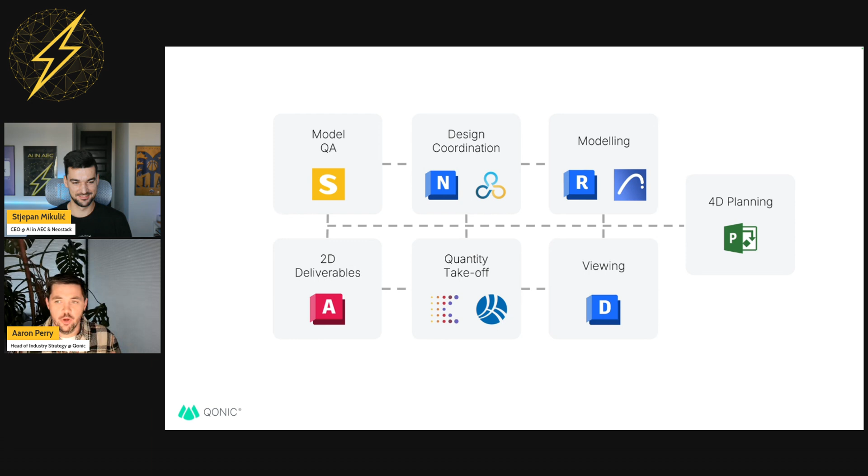But the challenge is when you want to move information between those different workflows, you do so by importing and exporting these kinds of file formats. And every time you do that, you're probably losing geometry, you're losing data, sanity, time, whatever it might be, and money. Every time you're moving between them, you're being frustrated by that process.

So probably the easiest way for me to describe what Qonic does is all of those things. It is a solid modeling tool with our own proprietary custom 3D solid modeling engine that runs in a web browser. It is a fantastic viewing tool, but more than that, you can actually edit stuff. You can play and manipulate with geometry and data in a really customizable, fluid way. You can use the tool for quantification, for design coordination and clash detection, and so on and so forth.

And I think the biggest value with this is that you're not wasting time in moving the data, but also in operation of the project. I've been through so many different workshops where you're sat in a room talking about a clash between a piece of steel and a duct, but actually that's no longer real, because in the live models it's already been moved around and maybe already been solved. So you kind of end up arguing about something that doesn't even exist anymore.

And so imagining it in a Qonic world, you're looking at design coordination in the same platform that you're modeling in. So when you see a clash, you just solve the clash instantly there and then, without going backwards and forwards three steps into different softwares. And so for me, this is that really, really bright light at the end of the tunnel that I'm super excited for everybody to get to, because it's a much more efficient way of delivering projects.

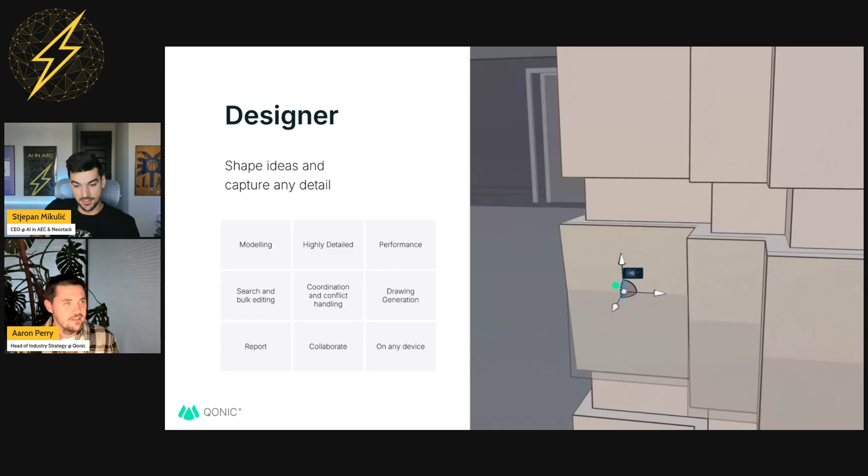Okay, this is a big announcement, so to speak, of what Qonic is. I'm excited to see the level it's at today, and what's your plan. You also mentioned your roadmap and so on. We're gonna get to all of those points. Yeah, I got some really fun stuff to show you around some live demos. Please go ahead, I'm gonna shut up.

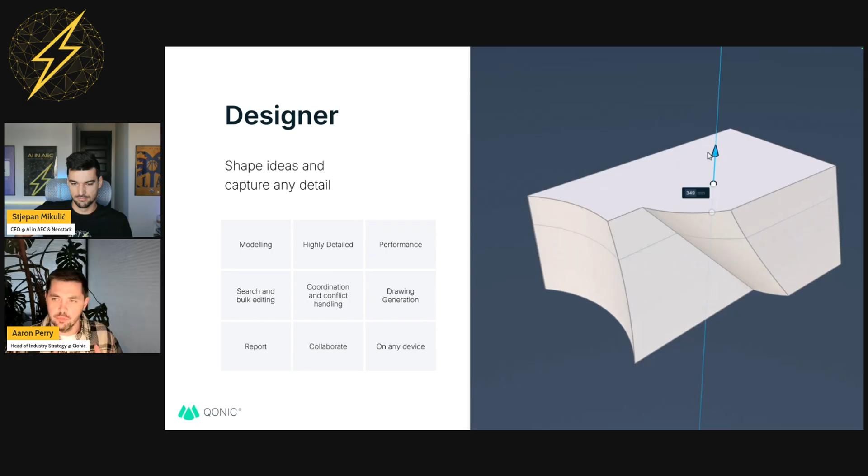Yeah, keep jumping in by all means. And maybe just to position it, because your audience is probably quite varied in where they're coming from, let me talk about it from four different perspectives. So from a designer side, my background is obviously architecture.

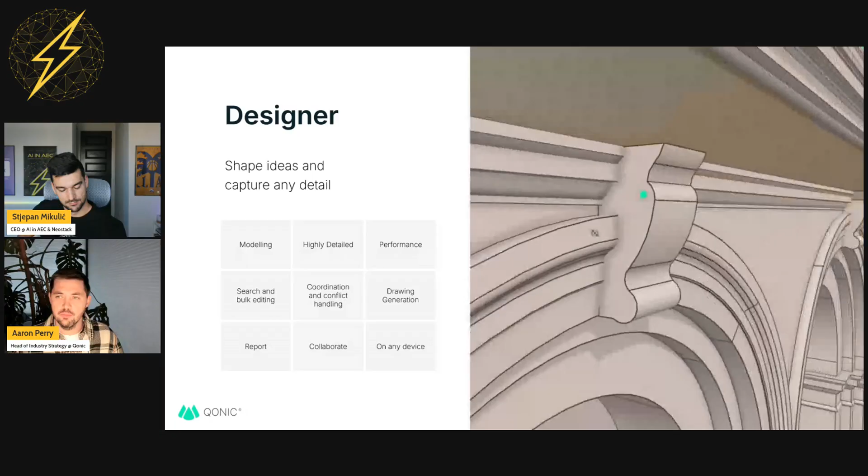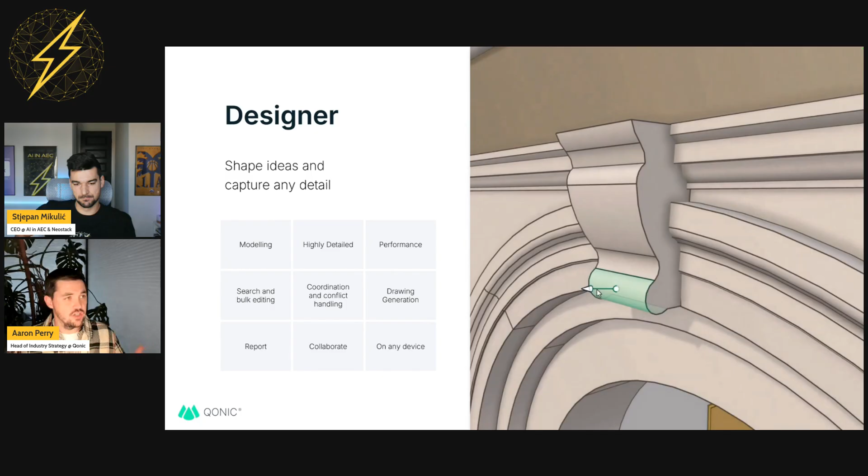Qonic for me is kind of incredible in that you have this super fluid, flexible modeling tool. Tools in here that you're recognizing from products like SketchUp or Rhino that allow you to just, when creativity strikes, grab something and move it and bend it and twist it and change it, without the kind of BIM object modeling tools that are quite locked and structured, where if you want to bend or twist something, you can't without editing it and fighting the software to do what you need to do.

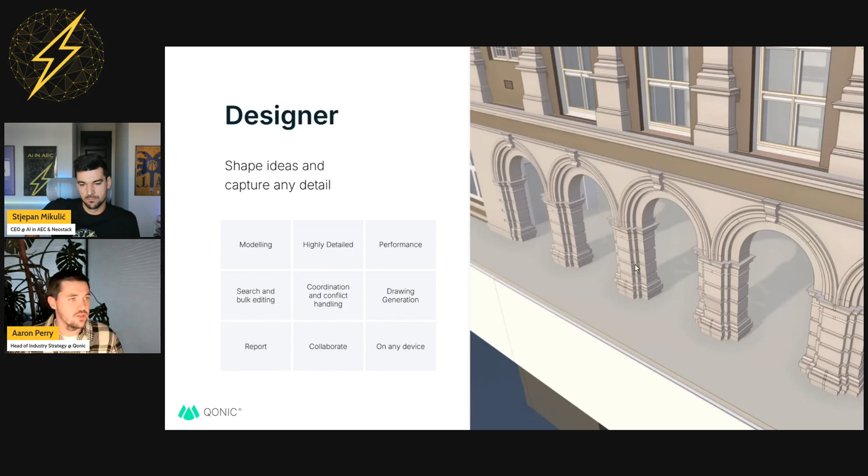So from the designer side, we have a lot of people using it because it's so fluid and flexible, but because it has an underlying IFC hierarchy and structure, you get the best of both worlds. You get the super flexible modeling, but you also get the ability to deliver a proper BIM project. Those two things combined is super powerful for designers and architects.

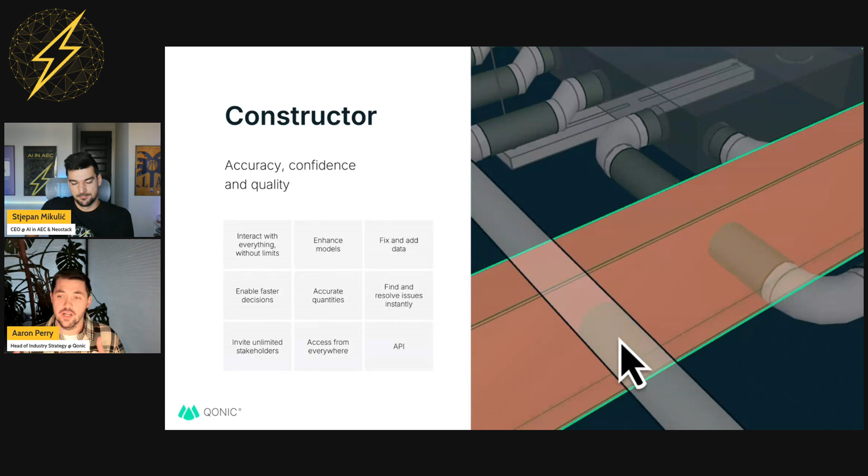Actually, more constructors and contractors use Qonic today, so I'd say this is probably the more popular segment. The reason is because effectively Qonic can do everything they need it to do. It's an amazing way for a constructor or contractor to aggregate all the models from the design team and the construction team and the supply chain.

Put 50, 60, 70 models up in Qonic. You can open them all instantly. You can open them in a web browser and understand the project. You can measure the project, you can review the project, and really start to get a feel for where it's at in terms of its delivery process.

You can quantify from it. You can do clash detection within it. You can really start to de-risk the project. It's very rare to be able to get all of those formats aggregated in the same place, but still do something with it, like actually edit stuff. If it's missing geometry or missing data, you can actually go in and start to change that.

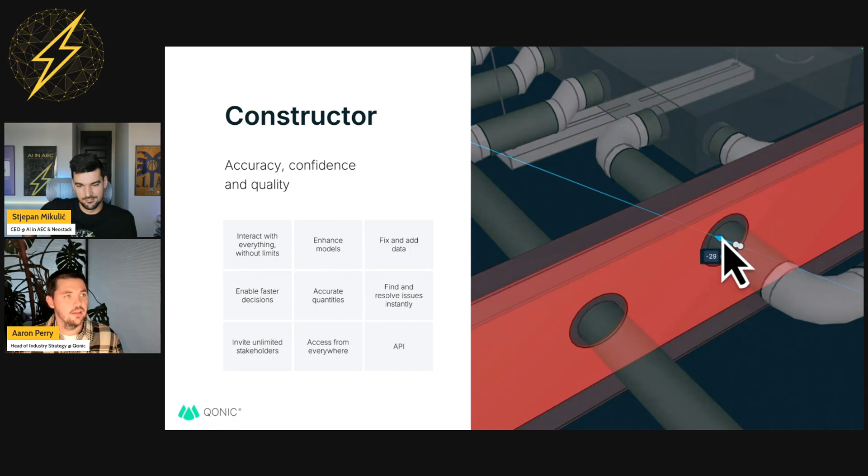And I know it's really small, but because it runs on a mobile device, someone being on a construction site can get the answer to the question they need instantly. It sounds silly, but they're looking at the exact same experience on the mobile device that they would be as if they were sat in an office. It's not a stripped down or exported version that runs better on mobile, it's the same thing. That is, I think, kind of unique to some extent. I've not really seen that in some of the other tools that offer those kind of mobile apps.

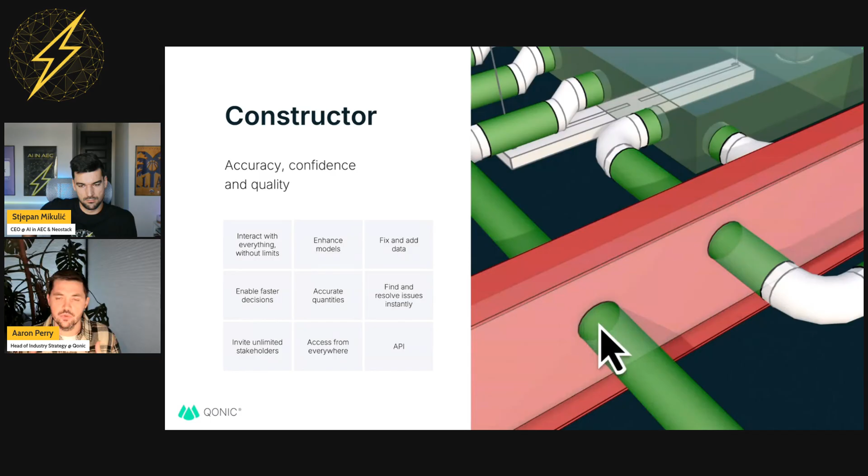For those kind of projects you work on with a deep requirement for providing information through the project, maybe you have a really engaged client that wants to use these models in this whole BIM output process to manage either the building or the estate of buildings they're inheriting. The information production is really, really important, and I know firsthand that often that gets left to the last minute. People realize it was serious when the client asked for the ones and zeros in all the right boxes, in all the right places, for them to actually use the project at the end.

And there's often a lot of excuses in information management, like, oh, it requires another tool that I don't have a license for, I don't know how to use. I guess those excuses kind of fade away when someone can click a link in an email and they're in the product straight away, right? They're just in the browser and they're editing data. So it is, again, proving to be really quite valuable from an information management point of view.

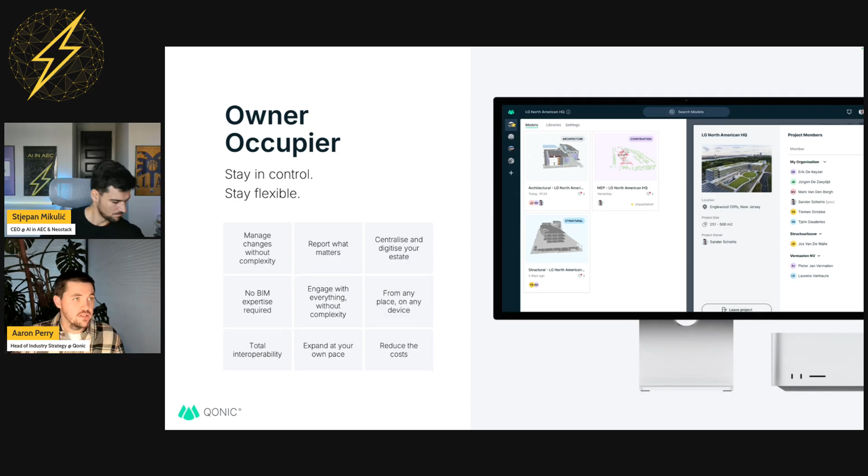Anytime they walk into a meeting room, they can just open up that data and engage with it. They can move walls around. They can understand what assets need to be maintained or managed after a few years. So there's a real focus from the client side of finally being able to do something with BIM data, which is something we're finding with a lot of the customers using Qonic right now.

And I guess maybe just finally on the overview of Qonic, it's an opportunity for the designer, the contractor, the owner, the occupier, all of those parties I just talked about, to actually be in the same place at the same time talking the same language, which is quite rare because usually there's quite fragmented conversations that are technology orientated sometimes, and those are the excuses why they can't all be having the same conversation at the same time. Qonic, I think, definitely starts to pull all of that together and allows for a type of conversation we've not typically had in AEC to date.

So yeah, there's an overview of Qonic in terms of what it can do. Okay, so if it would be one sentence, would Qonic be an all-in-one collaborative BIM management tool or a BIM modeling tool? What would you say it's better suited for?

Well, I think you obviously have a lot of conversations with a lot of startups, and you've probably seen over the last few years that many startups have started at the early stage, conceptual design, modeling, volumetric side of the spectrum. I think the best way I think about Qonic is that we went to the opposite end and said, let's focus on a platform that can handle the most complex amount of data possible, and then let's add the modeling tools a little bit later.

So Qonic's aspiration, to answer your question, is definitely modeling, but right now it's primarily an amazing tool to aggregate and manage all of that information that's come together. Because as you'll probably see in just a moment, you kind of fall off your chair the first time you see that quantity of data spinning around as if it's nothing.

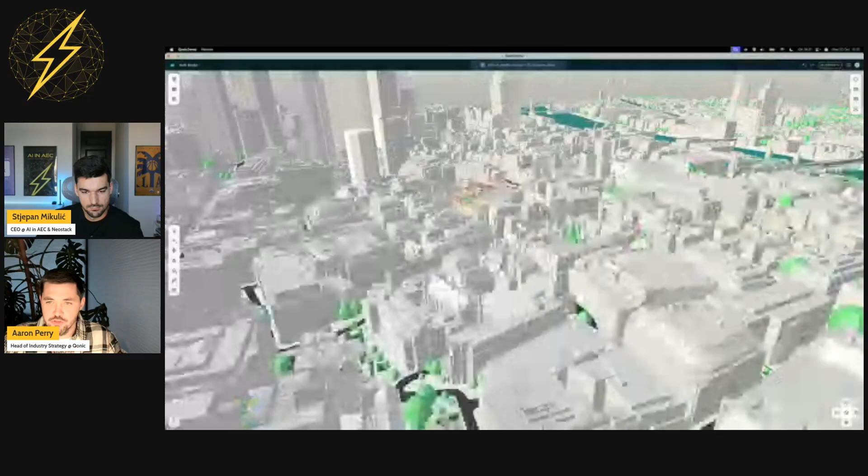I've just switched over to Qonic, which is running on my Mac, and I've just opened a project here in London. As you can see, the best thing for me to do right now is probably zoom out, and you can get a sense of what Qonic's all about. We have no issues dealing with huge scale geometry.

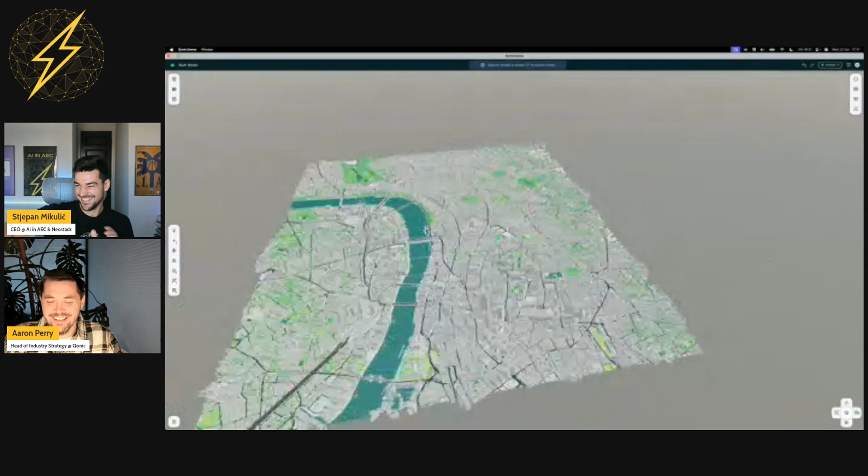Oh my god, you nailed it, man! I love this. Wait, so I have a couple of questions. Let's stay on this, this is amazing. First of all, how did you get this huge data set, and what is it? Is it like massing from, I don't know, Google Maps, somehow extracted? How did you get this?

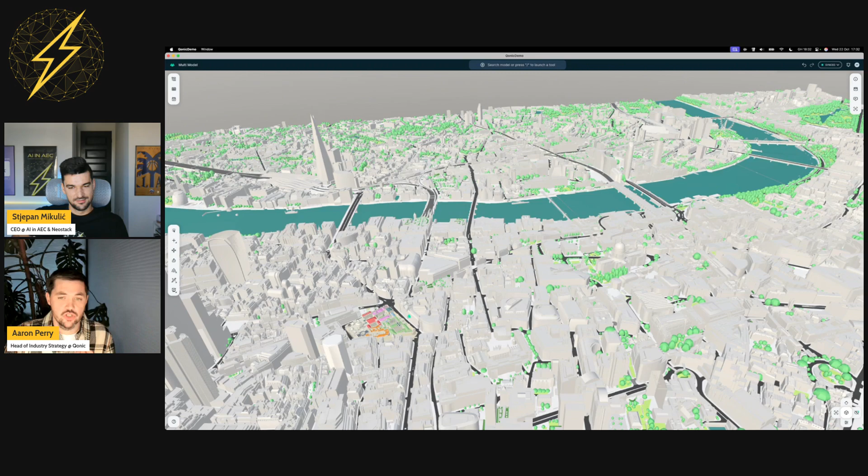Yeah, so this was actually some data that I had access to from a previous project I worked on in architecture. So I already had this geometry existing. This is the kind of geometry that when you're building a big building in central London, it's so important to have this contextual data so that you can see - especially in London, we have verified views around the city so that you can still see St. Paul's whilst you're building a building. So I had access to this data, but we've just announced some partnerships with companies like CityWeft, where you can actually bring in 3D data to instigate a project from. You'll see some examples of that on our LinkedIn as well. But ultimately, a user can bring in any source of data they like. So in this instance, it's just a giant bunch of solid models which represent buildings here in London. And I've obviously got a bit more detail here on this open source project for the Bank of England, which was made a couple of years ago, showing basically what the Bank of England looked like a few years ago.

Okay, and let me understand - so because you mentioned you're running it on your Mac, does this then require a Mac, or can you run it on Windows? Is it a desktop app? Is it a web app? What is Qonic?

Yeah, so the default is it runs in your web browser, and basically after this bit of the demo, I'm only going to show from the web browser. So it's kind of agnostic at that point which device you're using. We have an installer for Windows computers and for Mac computers, and basically what that does is it unleashes any performance restrictions that your browser puts on. A lot of browsers have a maximum amount of RAM they can use of your machine's compute power. So by installing the Windows or Mac installer, you move past those restrictions, and it can use the total performance of your local machine. It's not a requirement - you don't have to do that. But of course, when you're dealing with maybe a larger model, it's always preferable to use everything your computer can throw at it.

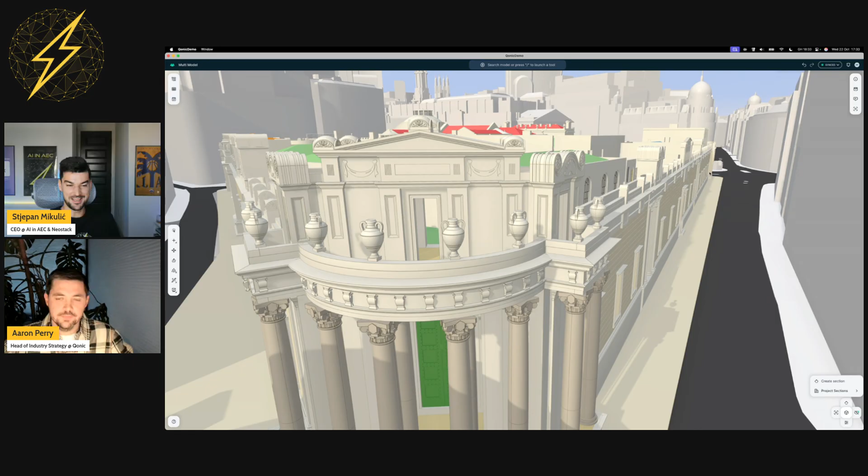So, wow! Please keep zooming around, man. I'm in love. This is awesome.

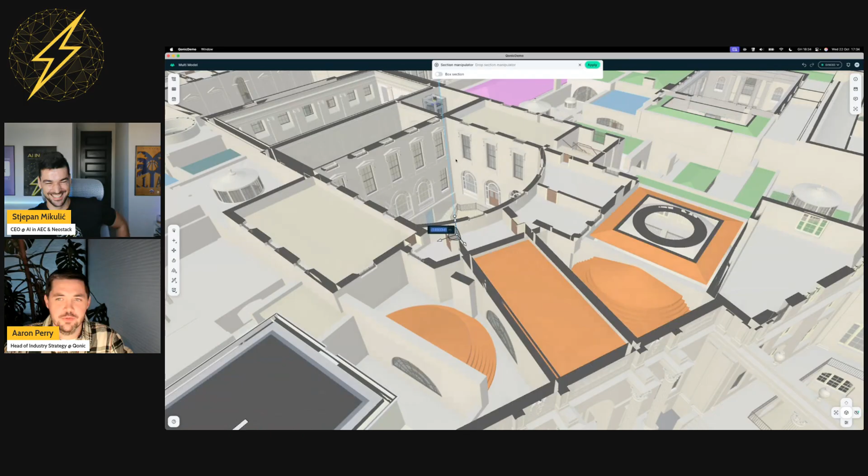Good stuff. Well, I remember the first time I saw this, and it's the type of thing that when I got back to my desk in the office and I was just sat there waiting, looking at a loading screen, I was just thinking, why do I have to do this? Why do I have to look at this loading screen? Why is this a thing that we've just accepted in our industry? Yes, and hopefully similar for yourself or for any of your viewers - you're kind of like, how am I doing this? And you can see that the level of detail here is basically streaming in as I zoom and move around the model.

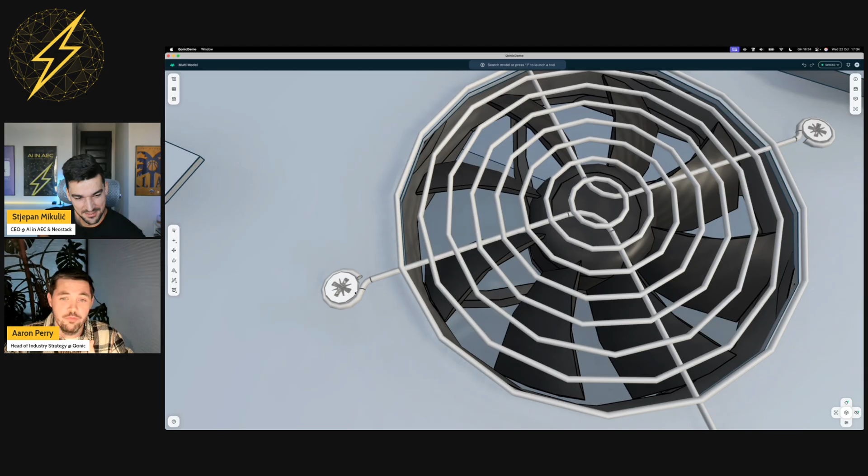This is what I'm talking about when I say gaming engine style technology. I've spent the last 10 years telling people not to model bolts, threads, and screws, but as you can see in Qonic, we don't really care. You can do that if you want, that's fine.

I wasted so much time myself in my work previously as an engineer, as an architect, as a BIM manager, just waiting. So what we would do, both at Sweco and Big, we would open the model before we even commuted to work. We would start opening the model, close the laptop, and then commute to work.

Or if you didn't do it, you'd open it at work, but then for the first hour I would just get back on email, drink coffee. Every time you wait for something, it's an excuse to open Facebook, open LinkedIn, something that takes you away from what you're supposed to do.

There's absolutely no reason why this industry accepts that performance. There are tools out there, hello Qonic, that completely ignore those traditional barriers. This runs in a web browser, so you can be on a laptop in a meeting room. These barriers, these problems that stifle our efficiency, they're gone with Qonic. That's the main thing I want people to be comfortable with.

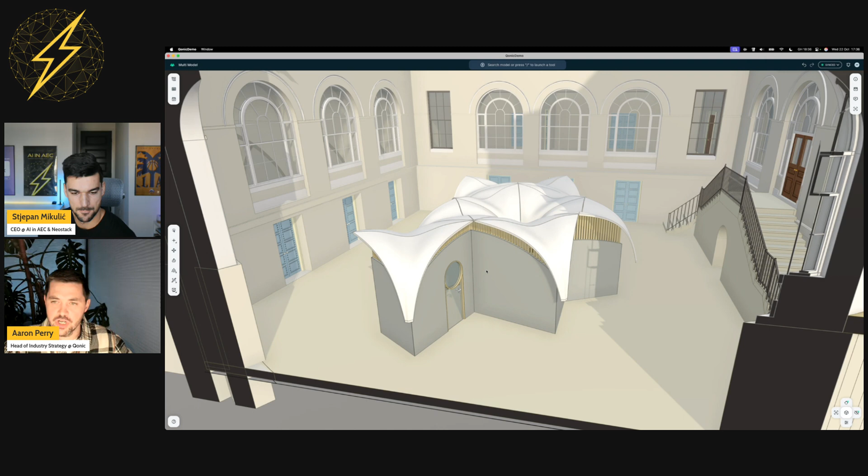Let me keep running through the demo here. I've got this pavilion in the courtyard of this project. This actually came in from Rhino, so you can see we've got complex geometry, difficult things going on. Qonic can engage with this, it converts it into solid geometry. This is not like a mesh you can't do anything with, this is all usable geometry.

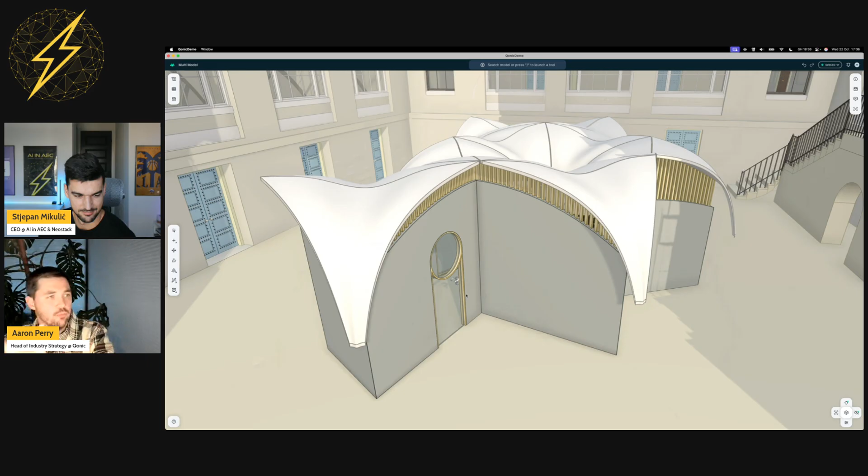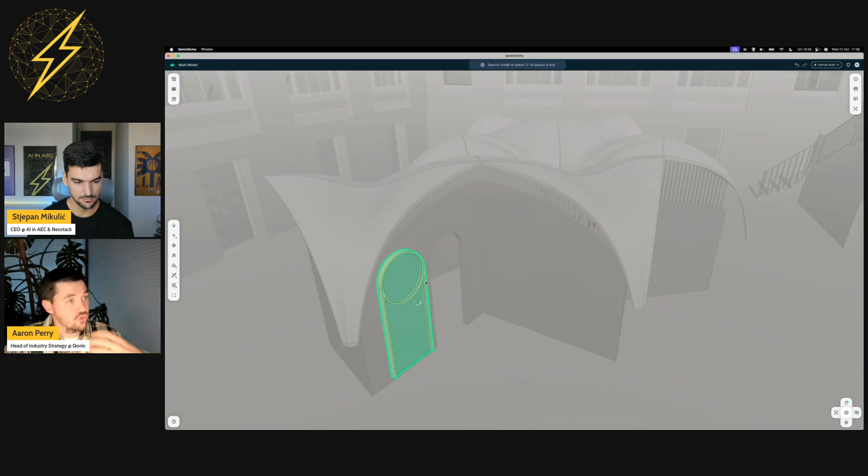So it's not uncommon to use this workflow, try it, and then come into Qonic and turn it into a BIM project and move it forward. For my first bit of the demo, I've got a door here and I'm just going to move it. The reason I'm doing that is this door came through IFC, and the problem with IFC is you lose all of the intelligence, all the constraints and associations you built up in your original tool.

This door that's come across, I'm not sure how well you can see this, but it's actually a building element proxy, unclassified geometry. It's called a door but doesn't actually perform or behave like a door. The challenge is it might look right in ArchiCAD or Revit, but when you need to give it to someone to use for something, that's where the intelligence really breaks down.

Now the example of utilizing AI, specifically machine learning, is we want to be able to classify things in this project appropriately. If I select this door and click into change and modify its data, I have a long list of all the things I could choose it to be. This is amazing because I could actually say it's a floor if I wanted to, I don't know why, but there are architects out there that claim walls are floors, fun stuff like that.

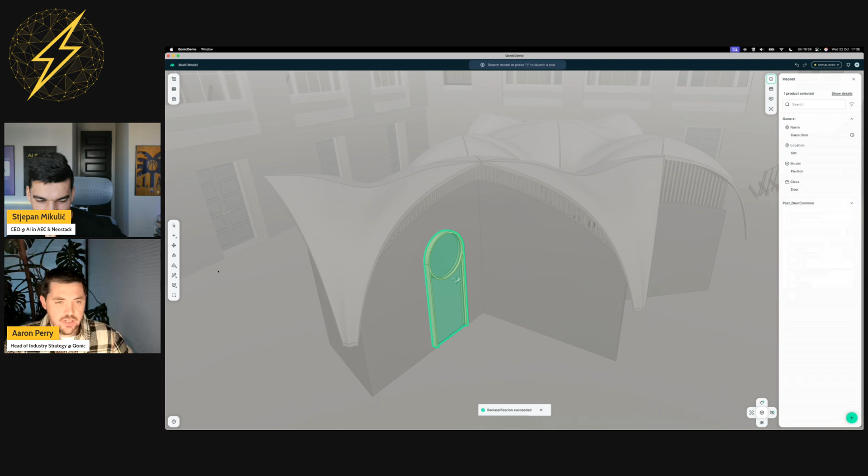But what I'm actually going to do is turn on our tool to automatically classify the object, and almost instantaneously it's a door. This sounds like a basic example, but now it will perform like a door, which means when I adjust it, stretch it, change it, modify it, schedule it, detail it, export it as Excel, it is now a door. This is a door item. This is now fully classified, data-rich geometry, even though this came into Qonic from Rhino like 2 minutes ago.

And the use case here, of course, this doesn't have to be something easy like a door.

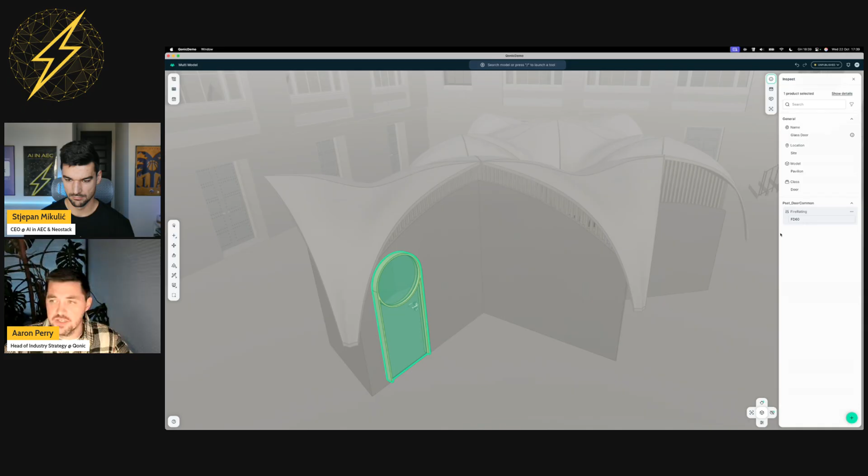Of course, this object, I can start to go in and add more data to it. So I've just realized it has no fire rating. I can just go in here and type in that it's FD60 from a fire rating point of view. Maybe if I browse my model, I've got multiple models open here.

Let's just do a little report of my project. This is the same setup, I've got it done by building, by model, and now by class. I can measure things in areas and volumes and concrete quantities, counts, etc. But I've got another configuration of this report in the background, which is about fire ratings. So I can see across my entire project that I have a series of doors that haven't actually been classified just yet.

So these are unclassified doors, they have no fire ratings. Maybe this is something I'm quite concerned about. Qonic's a really great way to visualize models. Maybe this is the first time I've ever opened this project, I don't really know it very well, but it's a really quick way to understand what is working, what is correct, and what is not right in my project.

With those doors, maybe I select them, and you can see all the parameters on the right-hand side, the data points about all these doors. They have different names, different typologies, different heights and widths and so on. The point I'm trying to make is how easy it is to improve and enhance the data of these objects. So I'm just going to add some IFC parameters, add the fire rating to these doors, and not just add that parameter to those objects, but also provide a data point, a value for that as well.

So all of these doors - 179 of which now have that 60-minute fire rating in my project. And again, this seems like a really small example. Think of it from the other side.

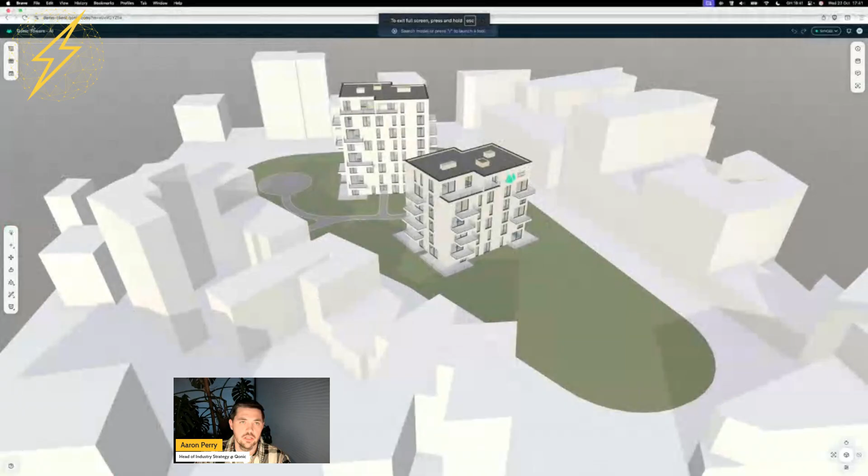Yeah, so from our Qonic dashboard, which is this web interface, I can create a new project, and it's a case of just pulling in the models that I would like. So these could be IFC files, Rhino files, SketchUp files. In the Revit journey, there's a couple of different approaches. One way is to put a Qonic plugin on your Revit instance, and then with the Revit model open, you can publish to Qonic. An alternative way is you just drag a Revit file into this web page, and it will process and then be available for you in Qonic.

The only benefit of doing it through the plugin is that if you then make changes in Qonic, like say for example you had 10,000 parameters, you can actually then push those changes back to the original Revit file.

The original Revit file will still have all your view templates, your overrides, and your title blocks, and all the kind of original stuff that you maybe wanted in your project. But you haven't had to open ten Revit models to manually add all the parameters to each one of those files. So that's the big difference.

Wow, that's impressive, man. Yeah, go ahead, please. Don't let me stop you.

It's amazing to be able to add all of that information and to be able to kind of really quickly start to engage with the project that you're working on.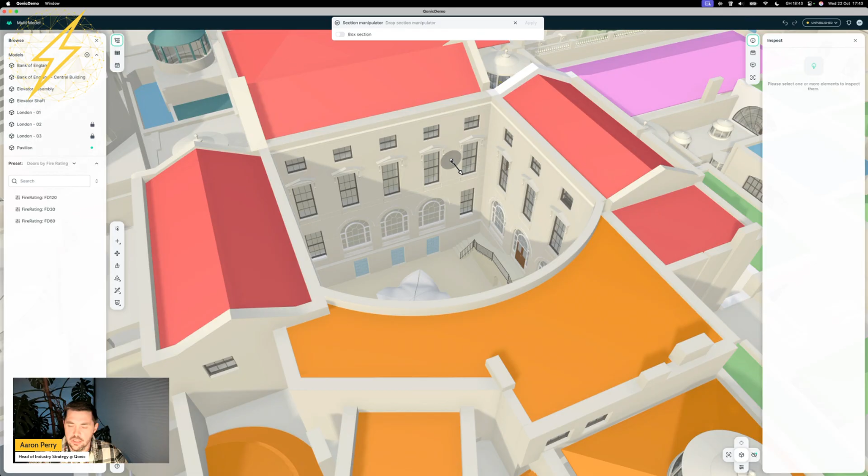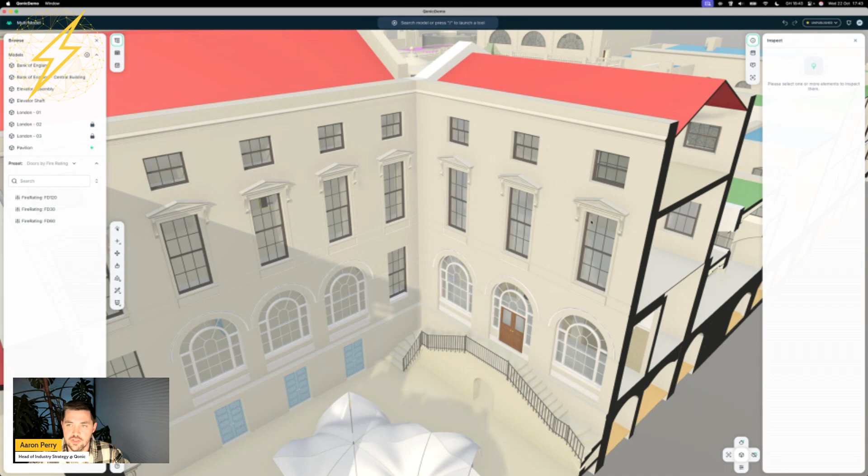I'll change the example for just a second. We'll talk a little bit about modeling. As is often the case with heritage buildings, or just real buildings, just a real world example of a building, not everything is the same. This isn't student accommodation or a hotel where every window is identical. This is real life, this is the types of projects that we deal with. You can see here all the windows, the different shapes and sizes, and they have different attributes to them. Whether it's a new build or an existing build, sometimes when creativity hits, you just want to be able to engage with this content, and you want to be able to do stuff with this information.

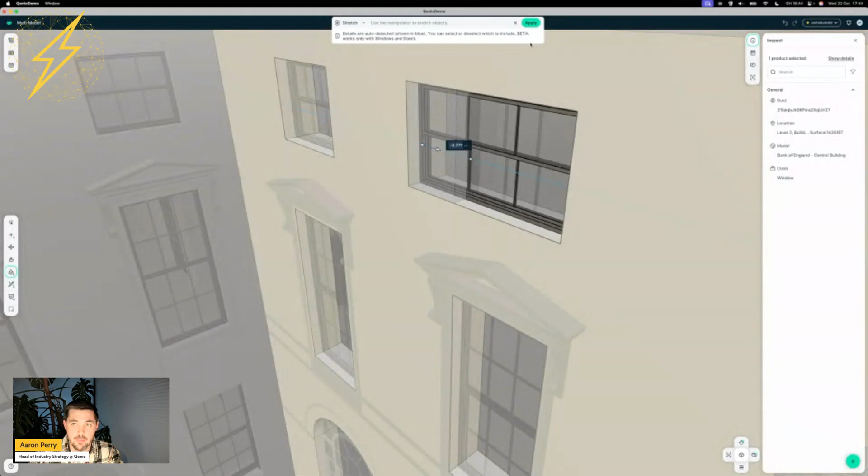I just want to show you an example here. Again, these windows are all different shapes and sizes, but if I grab this window, I can just stretch it straight away. You'll notice a couple of things are happening automatically in this instance. It understands that there is some parametricism to the window in terms of the mullion, in terms of the height. What you're seeing really is the glass has increased. It's not that the actual window frame has been stretched, or the key geometric and dimensional properties have changed. It's actually just the amount of glass.

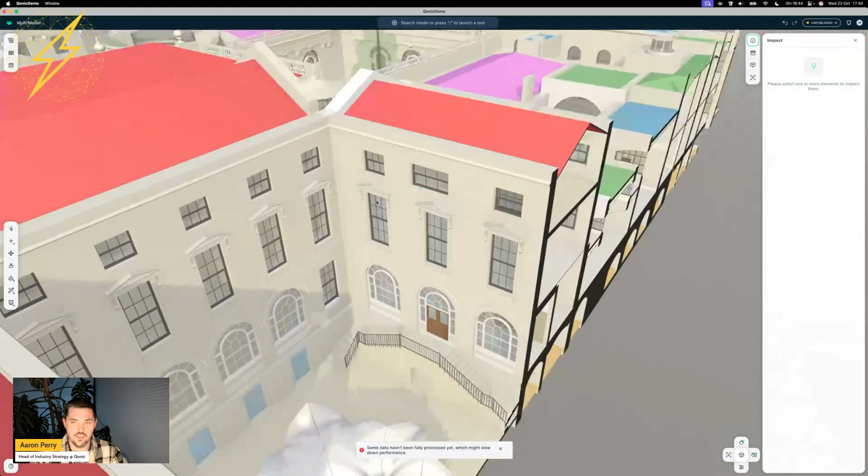That fluidity is what you would expect from a tool like Qonic. These are objects. I can click on that window and I'll have lots of parameters about the object, but I want that fluidity of being able to kind of push and pull it. As my design, my creativity strikes, I want to be able to have that level of instantaneous fluid design iteration.

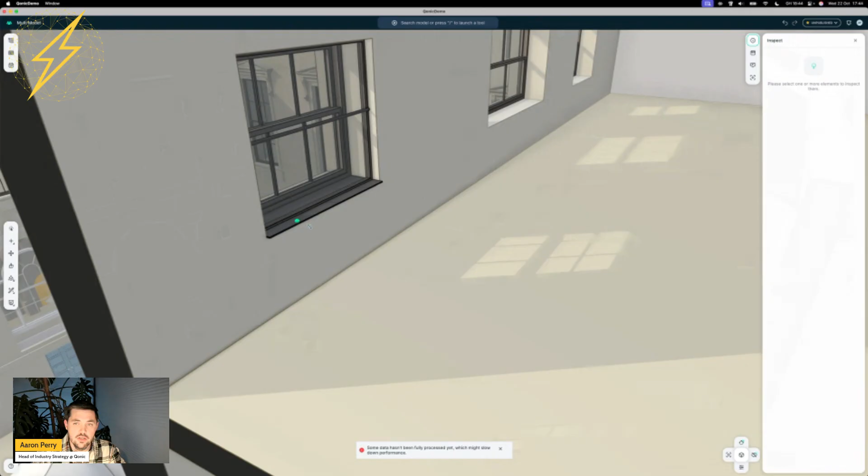That's not necessarily uncommon, that happens quite a lot. Again, in this instance, you can see a lot of these windows have lots of different detail elements to them. If I just spin inside this window, you can see, for example, I've actually just gone in and modeled some additional geometry. So I've put a sill in here, I've put in a secondary glazing system, I've put in a safety bar to stop people from leaning against the existing windows that are on the outside. These are quite common as part of a refurbishment. We're adding all this extra detail in, and these will all be manufactured by different trades and different contractors. So all of these parts, I actually do want them to not be within one window family or component. I quite like the idea of these being separate because they'll be installed, manufactured, demolished, all separately from each other.

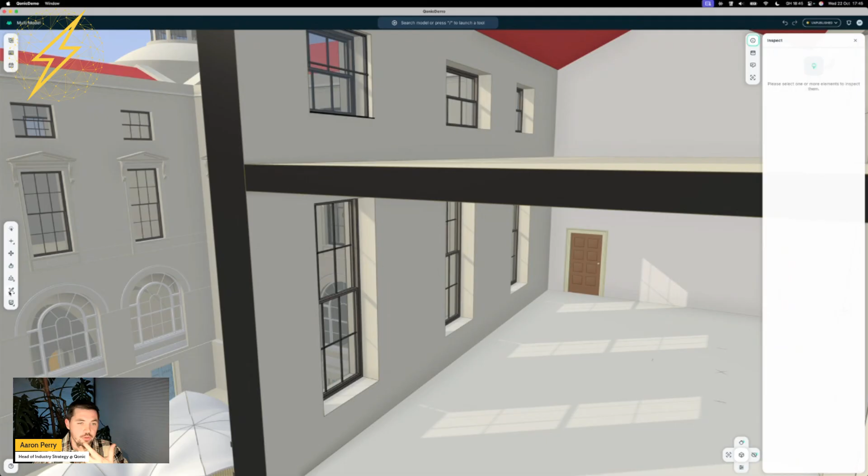Now, if I wanted to replicate that level of detail to the other windows, your initial reaction would probably be like, well, that's kind of manual. You'd have to manually apply that and model that to each window because they're all different sizes, they're all different shapes, they're all maybe different actual physical types of window. You can probably know where I'm going with this one. That's not necessarily the case with Qonic.

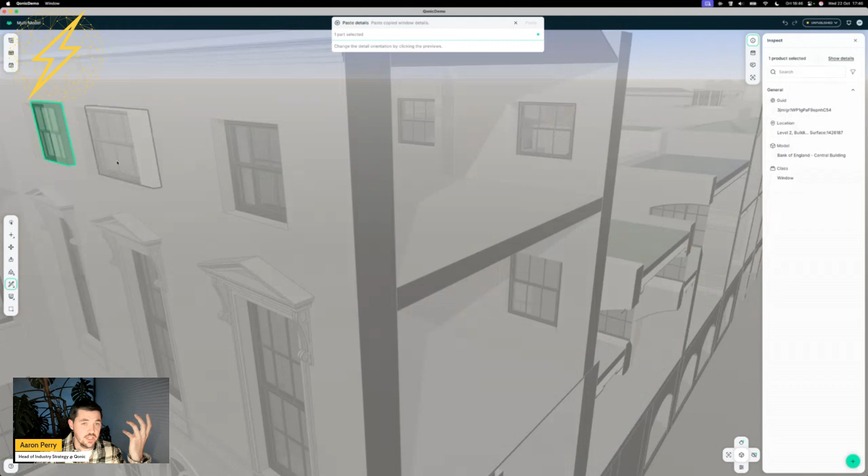So if I click on that window to select it using a copy detailing tool, you'll see that it immediately understands the additional detailing associated to that window, even though that's not part of the window component. It understands that there is some detailing there that's available to the window, even though again it's not part of the window. You can probably predict what I'm about to do, but I'm just going to grab these additional windows here, and I'm effectively going to paste that extra detailing that you saw to those additional windows. Again, these windows are different sizes, they are different shapes, they might have different manufacturers, they might be completely different components, but the logic of what I'm trying to do, that's what Qonic understands.

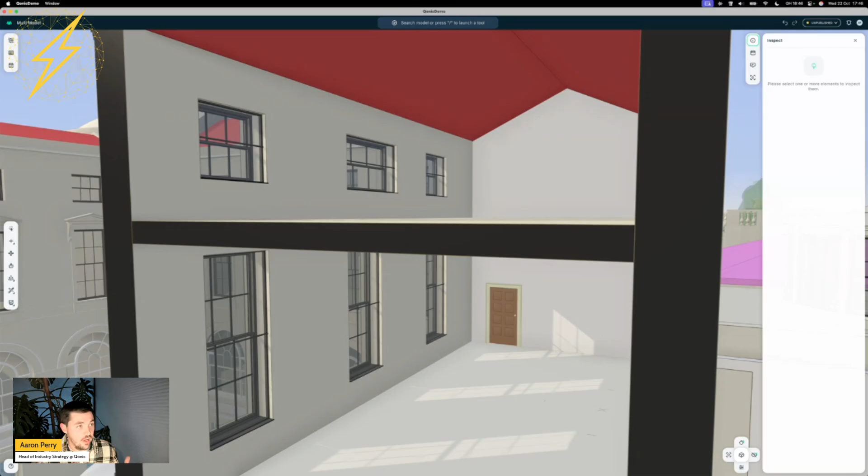Qonic's really good at applying that kind of logical, common sense approach, the application of intelligence, the understanding of construction to make for these really flexible uses where it's really, really easy to be able to add this level of detail into the models that you're working on. So for us, it's about making the modeling process fun, enjoyable, fast, rather than like it feeling like you're fighting with the software.

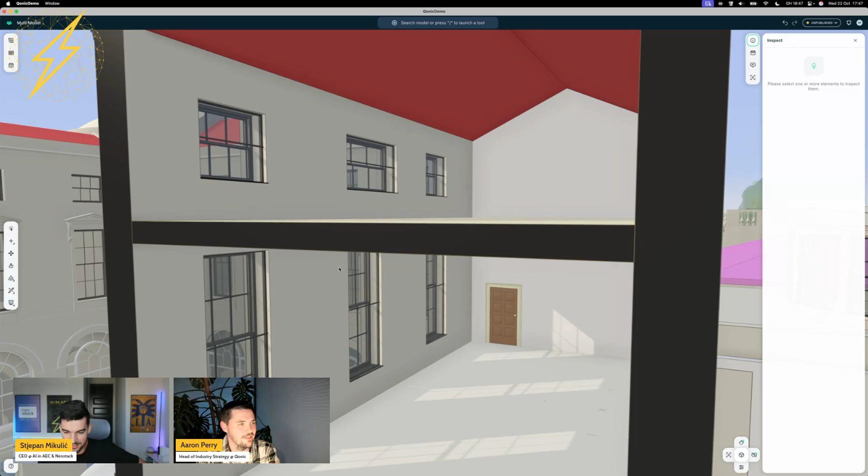Wow, I think many in the audience are sharing my view on this. I have rarely had, I think I've never had this big of an ROE, like return on expectations. If somebody says, yeah, it's another BIM-like management platform, okay, ACC can do this stuff, but ACC can't do this for sure. This is amazing, man. Thank you so much for sharing this. I do have a question about it.

Actually, just last week I went to Hungary, and they also have a lot of these heritage buildings and all of these details. So how would you go about it? Can you model stuff within Qonic, or is it better to model elsewhere and then copy it around afterwards? Is it better to model in something else, like Revit or Rhino, and then move it back?

Well, I guess the key thing from a Qonic side is that we have no limitations on the level of detail or density that you go to. So with heritage columns and the real intense detail you find on existing listed facades of historic buildings, there's no issue for Qonic getting to that level of detail. Sometimes that's not always the case with other tools you might have referenced, and naturally it will be easier to manage that quantity of data in the Qonic platform.

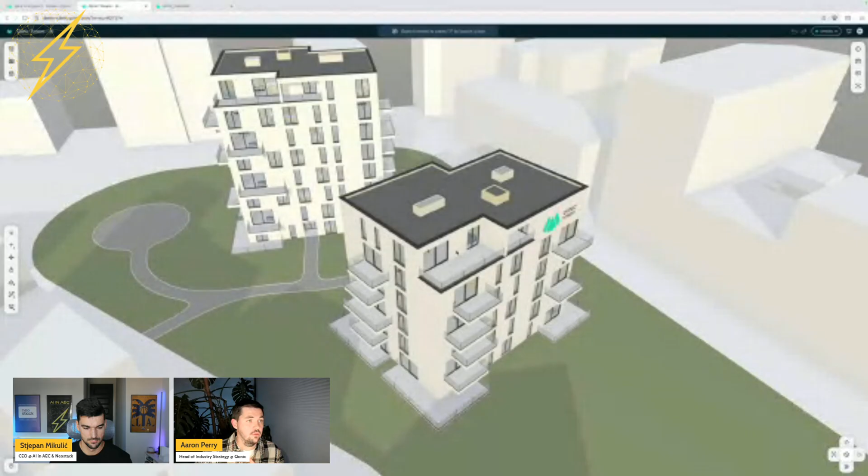We have modeling tools that allow you to create geometries right now. I think in the next month or two we'll be bringing through a component library system, which allows you to populate models with pre-existing organizational libraries of content, or maybe manufacturers' content. But we've definitely still got some more tools to build.

In the interim, if you are faster at modeling this kind of stuff in SketchUp or Rhino or whatever, keep doing that. You can work in that tool and then bring it into Qonic. Click on that column, use the machine learning to automatically classify it as a column, so it's in your column schedules and all of those things. You can bring materiality to the object, fire ratings, performance, specification. Obviously it depends on that user's experience—if they have a tool they really love, keep using it, and just complement it with Qonic, where you can then take it forward, do the clash detection, do the issue management, do the handover, and all of the lovely stuff in terms of BIM.

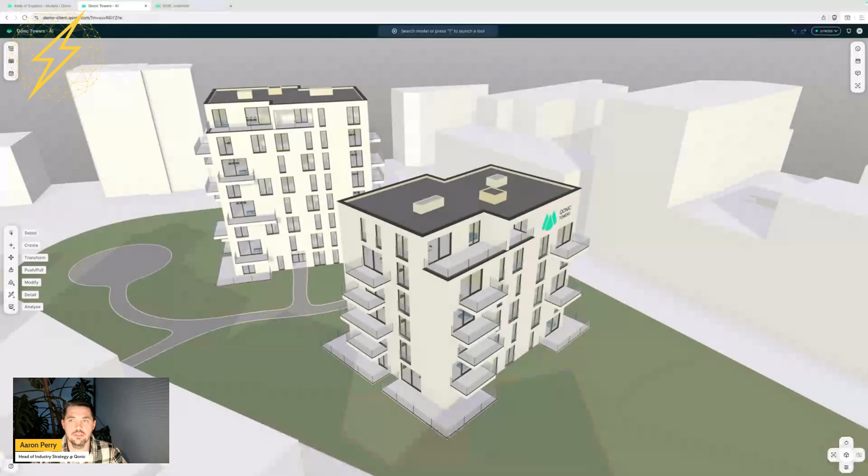Amazing. Yeah, please go ahead. Okay, so I was jumping into a model here, and this is again just running in browser, in case anybody's uncertain. But there's just one more example of this kind of modeling stuff that I really want to show, because for me this is such a common, typical thing I'm used to experiencing on projects. It's another example of being able to stretch an object and see the results of that happening, and the benefit of that.

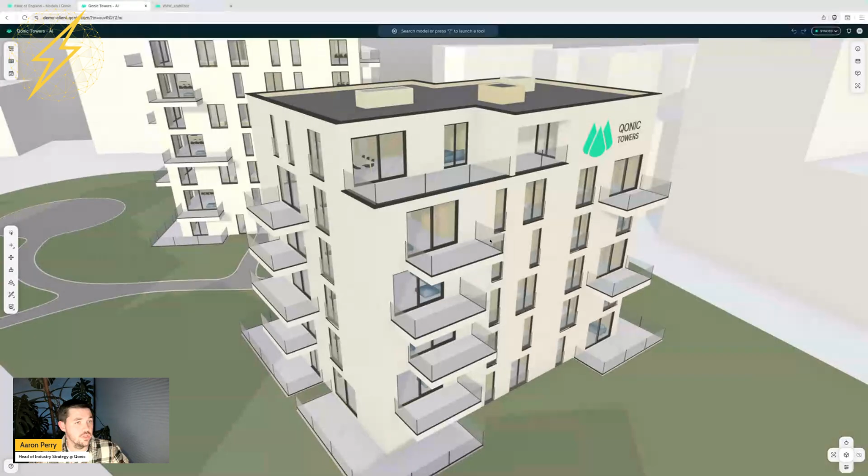Let's say this is quite a developed project. We're through delivering this now, we're on site, working with contractors. During the development and delivery of a project, things change. It's not like design randomly stops one day and then we build it—design actually continues through the build process. Something like a balcony design, for example, maybe the contractor has a comment about how they can build it cheaper or faster, or maybe there's a way they can pre-manufacture it off-site somewhere.

This balcony you see here is actually all modeled as individual components. We have edges, railings, glass, and the soffit under here is its own individual component. Maybe there's a scenario where this can be pre-built at a set size and it just gets bolted onto the building. That's not how we initially designed it, but that's the evolution at this point of the design and how it's coming. Like I said, they're all separate components.

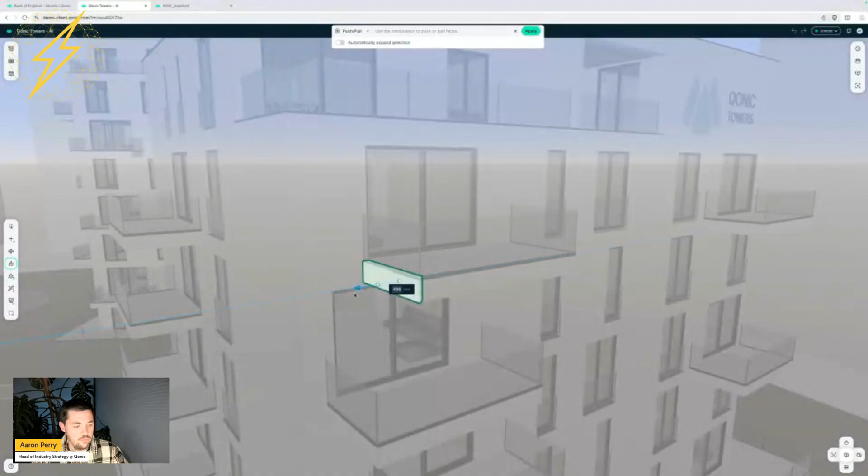They're all individual pieces. But the thing I want to show here, because I really love this example, is if I was to grab the edge of this balcony and resize it—sorry, there's a really important tick box—I'm going to automatically expand my selection. So as I expand this balcony, you can see by the color override here, something else is happening.

This is actually understanding that the edge of this balcony is related to the soffit, it's related to the glazing, it's related to the railing. These things are a system. This is another example of Qonic's understanding of construction and applied intelligence. We know how buildings come together. So when you're stretching the edge of that balcony, you're seeing that other things are adapting at the same time.

There's a really good example of that moment creativity strikes. I need to do something. Do I have to select ten individual components and resize them? Or maybe I can just grab the balcony and the whole thing works as one item.

And in some parametric tools, these things can do the same, but you have to manually align and lock and constrain the model. And the problem with over-constraining models is that's when you get that performance barrier.

What you're seeing here, Qonic doing on the fly, is by automatically expanding that selection, Qonic's building those associations in the moment you're doing it. It's not looking every time you touch an object to see how many other objects might be affected by it—it's doing it when you actually make the change.

Again, that's a huge performance boost over some of those traditional modeling tools where you click something and you're just watching a spinning wheel whilst it works out if it can do anything else.

Okay, so maybe just before I come off this modeling example, I just want to highlight—you can probably see the direction of Qonic with some of this. For us, it's about providing fluidity to stretch a window or to resize a balcony. But we also want to make sure that what you're doing here is buildable.

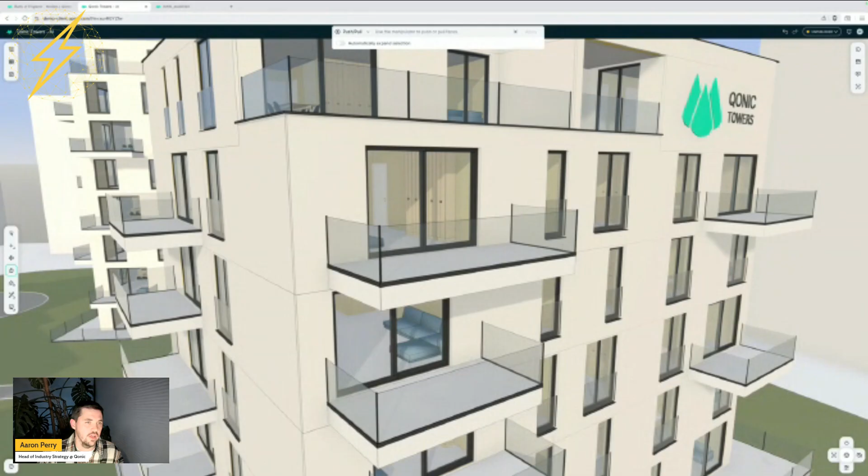So as you're doing these kinds of things with the modeling, how do I then go in and actually quality control, quality check the geometry and the design I'm developing? You get a real sense here of our approach to supporting designers and helping you create models that can be easily adapted and maintained, and really deliver design and construction projects.

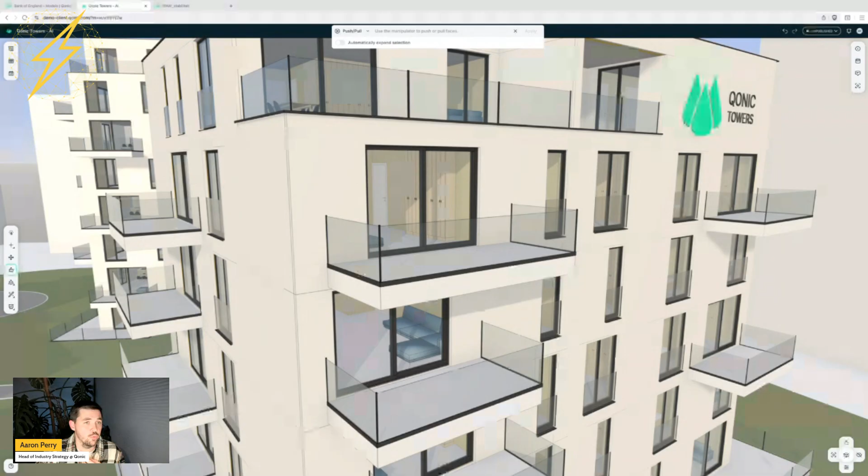Okay, so maybe for my second-to-last example, I just want to talk about—let's use this project again as the example here. I want to talk about and position some of BIM's biggest challenges, and I'm going to use one specifically, which is about inclusion.

There are some serious barriers to people being able to engage with BIM projects. One of those is skills. I think it's fair to say that BIM is often quite limited to those who have software experience. Companies have to make commitments to people to put them on a 3-day training course and a book, and please, never again is that going to be something we have to do.

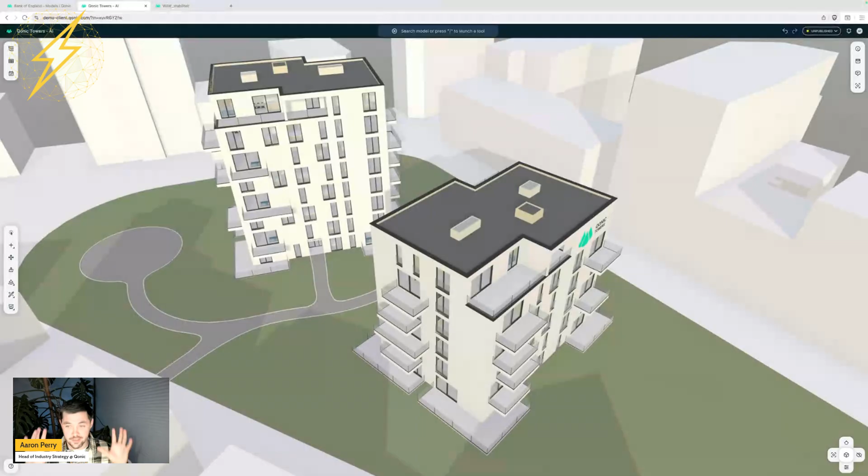Modern user interfaces should be much, much easier to understand. It's not about ribbon interfaces with tiny little icons that no one knows how to use.

Some of the other barriers I mentioned earlier are around licensing. It is financially unviable for businesses to provide licenses to everyone, where you have these license models where you have to pay to access or pay per user. That just means licenses are only provided to the few, and operational costs for those businesses to actually assign, reassign, and provide temporary access to licenses. It's almost a full-time job for large companies now to move licenses around in order to give people access to the tools.

And again, the example I mentioned earlier about hardware - it's financially unviable to provide everyone in your business with a supercomputer just to open a model to answer a question. These hardware requirements are too high. People can't access the information when they need it, and that's most commonly on a construction site or in a meeting room.

One final barrier, not quite the same as the others I've just mentioned, but let's say you have a supercomputer, you have a license, and you have the skills to drive the software. I don't know this project very well, and I can't find the answer very easily.

So for us at Qonic, we really believe that everyone should be able to contribute to a project. If you think about removing those barriers, you're creating more equitable access for everyone. You're enabling questions to be answered without the excuses of, oh, I've got to go back to my desk, or let me check and I'll come back to you in 2 weeks. The important thing is we're moving the project forward.

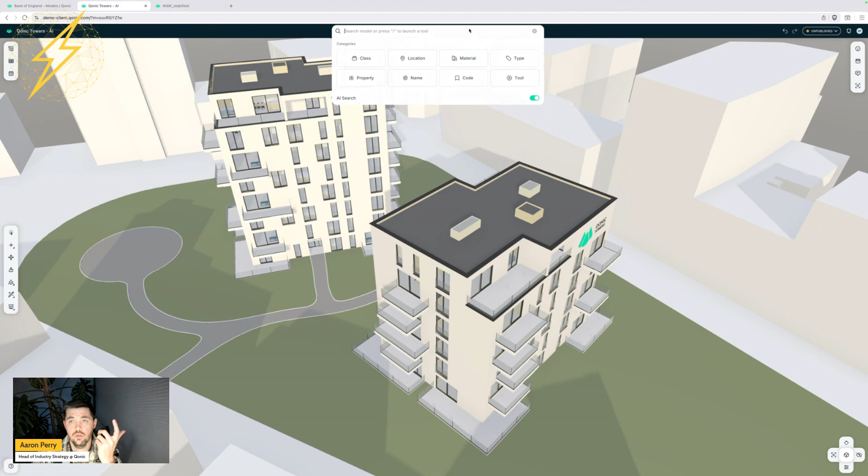So I'm just going to use the search bar at the top here in Qonic, and I'm basically just going to ask a question however my brain thinks to ask it. So I'm going to say, how many doors have a 1 hour fire rating?

Now, I don't know what any of the buttons do in Qonic, I don't know how this works. That is my question. There are 307 doors in my project with a 1 hour fire rating. And again, I haven't changed the question, because fire ratings are typically typed in as F60 or FD60 or whatever. So we're interpolating the question - we're understanding that, okay, you said an hour, F60 probably means 60 minutes, 60 minutes is an hour. We understand how many doors have got a fire rating of 60 minutes, that's an hour - there you go, 300 doors. So I have an answer to that question if I'm in that meeting room, and I can just quickly ask it and quickly get the answer.

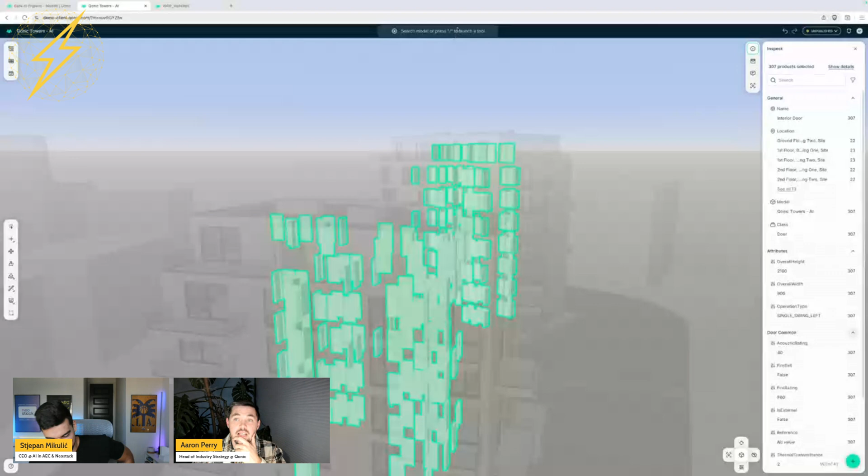I love this, and this is the AI part of it, right? So yeah, this is where we're effectively using natural language, a large language model, to process natural language interactions with software. And our understanding of how buildings come together and how they work means that we can connect those dots between industry relevant terminology and the data points that you might find in digital models.

So you're saying that now we can search for these doors in this case, and we can edit that data. Can we then get all of that in a table so we know how much quantity there is? Or is it all just visible here? As if we've rehearsed this, Stjepan, I'm going to ask another question.

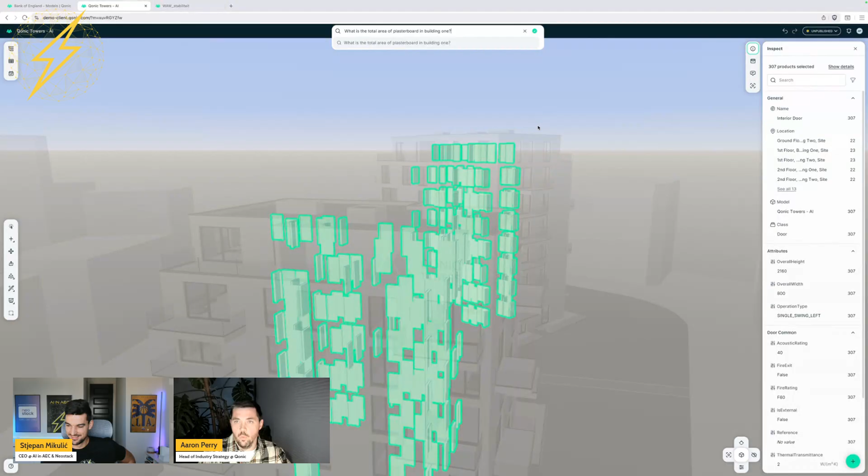So I'm going to say, what is the total area of plasterboard in building 1? Because that's a normal question that someone might ask - they might say, well, how much plasterboard do I have in my project? Well, I have 5,908 square meters of plasterboard in this project.

Amazing, and I can explore that. I can understand, oh cool, around the openings, the plasterboard has also gone right into the recesses of the doors. This is proper accurate modeling, because we don't care about how detailed you get or how much detail is in the models. We're not asking you to simplify them or dumb them down, which means you can go to that almost construction level of detail for finishes, which means your quantities are significantly more accurate.

This is amazing, man. I think the audience is so impressed with this. Do you have anything else you wanted to mention specifically today?

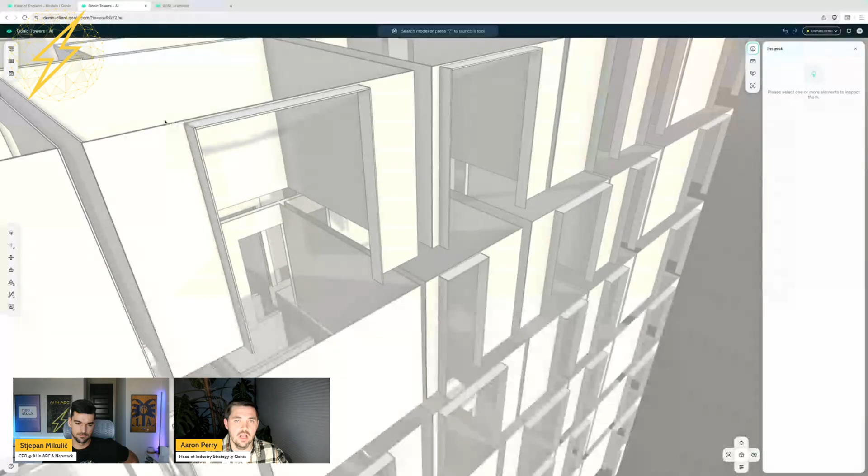Yeah, I'm going to show one more thing. The value there is that I have the answer to my question, and the project moves forward, whether I'm in a meeting room or a site office—it doesn't really matter.

My last example is more around construction and de-risking construction. Contractors use Qonic for two main reasons. One is responding to bids—it's a great platform to understand, assess, validate, quantify, and report all those quantities, exporting them as tables, XLS files, CSV files. I can visualize what I need, export it, and deliver it, getting to grips with the project and de-risking my bidding process as a contractor.

The other common use case for a contractor is handover. My deadline is November 1st—I have to hand over this data and geometry to my client, and maybe my supply chain hasn't quite got where I need them to be. So I use Qonic to aggregate all their models, query them, clean them, repair them, complete them, and then hand them over and deliver them.

Another example I want to go into is the bidding process—de-risking and preparing how to construct this building. It's not very complicated, but it's a really good example. This building is set out in sets of work: we have a basement, we have block A, and inside block A we have levels, walls, slabs, and so forth.

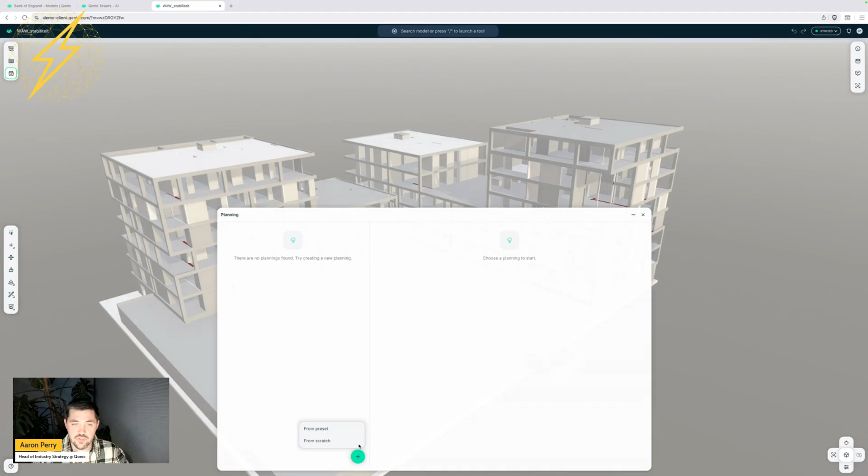I'm going to use Qonic's planning tools. Inside these planning tools, I'm able to create a new planning system for 4D construction simulation. I'll call this option 1, A and B, based on the configuration I've just set up for how I want my project to go.

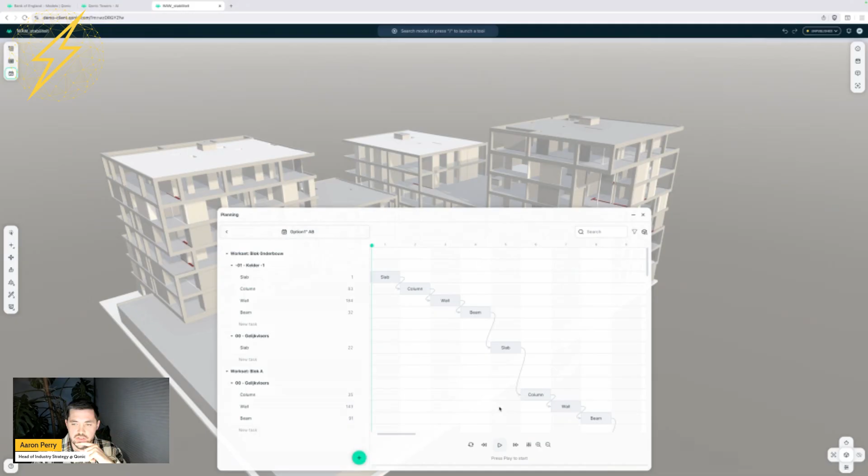I'm going to start this project on November 1st, and reorder these slightly—slab, then column, then wall, then beam. I'll come back to that sorting in a second. I'm also going to speed up the simulation so it's easier to demonstrate, but that's how long it takes to run a 4D construction simulation planning using Qonic.

Now there are tools out there that—sorry, I was a bit too late to add my camera, but my jaw dropped, this is amazing, this is so cool. We should have put a disclaimer at the beginning that you put something soft next to your chair, so every time you fall off it, you've got somewhere good to land.

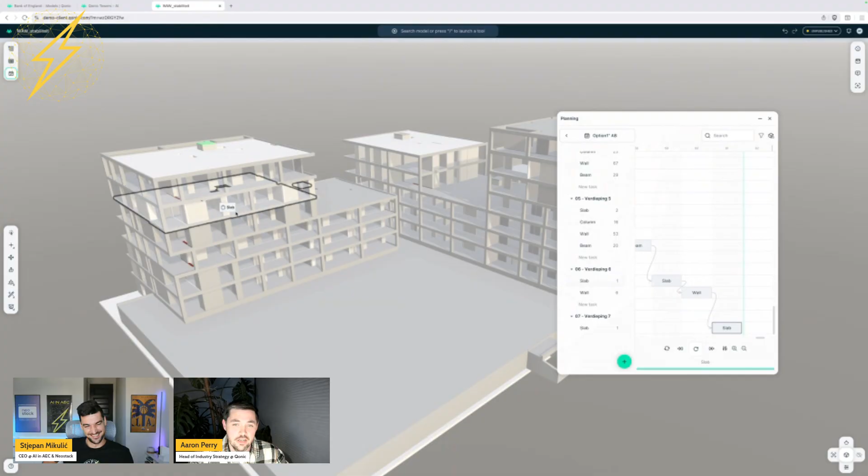This is very much a case where there are mature tools out here that enable contractors to do this kind of 4D construction simulation process, but this is a much faster automated process where your packages of information understand what needs to be built first before they're built. This is a significantly quicker way to deliver a bid—you've only got a set time to understand how the project's going to come together. Let me show you some examples.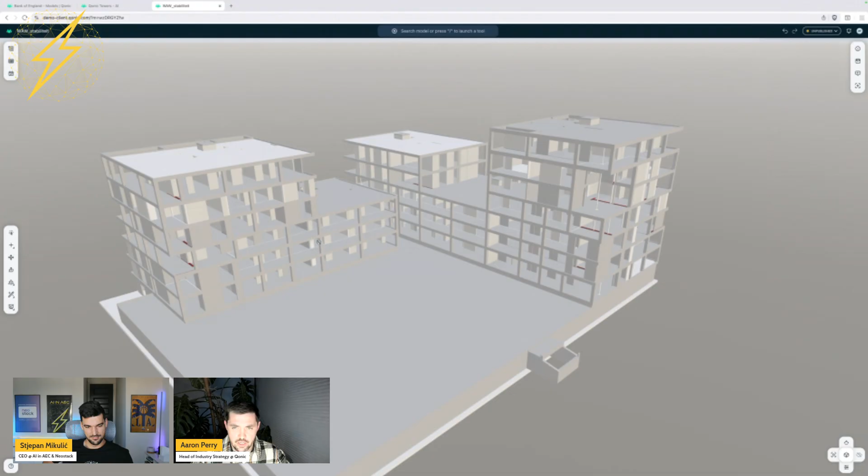Maybe there's another option I want to do, which is specifically to change the build order. If I just set this piece as my own, I'll turn it to the side and grab just this geometry here.

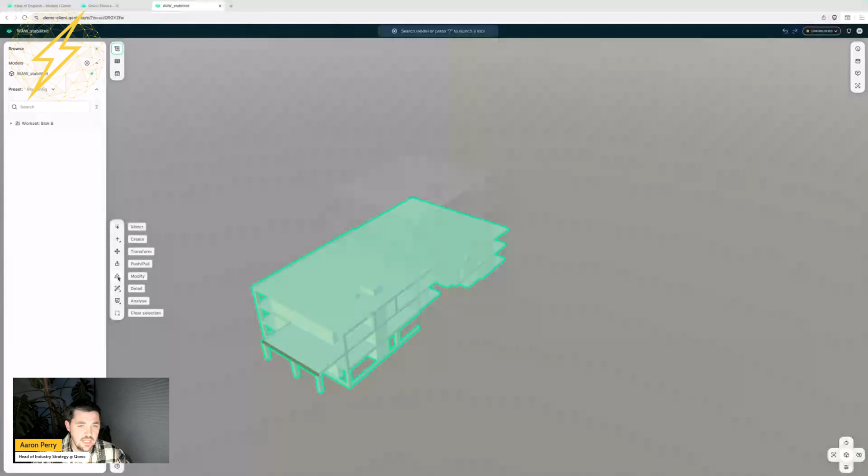What I'm going to do is modify this geometry. This is a pretty normal thing for contractors to do. Those floor slabs would never be built like that - they'd be built based on pour sizes. So I'm going to cut and slice those floor slabs based on this wall face you see here. That's now physically edited the geometry.

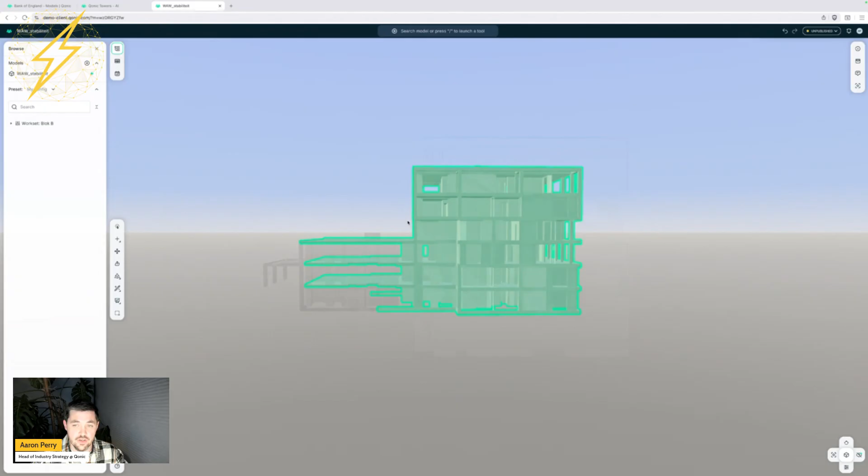I used to get this all the time, where contractors wanted us to model concrete slabs based on pour sizes. But as an architect, there's no scenario where we'd do that - we just model it as one big slab. It's the contractor's problem to go and deal with.

So what this means now is this geometry has been adapted based on maybe that pour slab size people wanted. And I can go in here and set that this is part of block C instead of block B.

The reason I'm doing this is so I can reset my scope, go back into planning, and create a new option here from the preset. I'll call this option 2, A, B, and C. Similar process as before - literally 4 or 5 clicks. I need to make sure I get my order correct again with slabs, columns, walls, and beams.

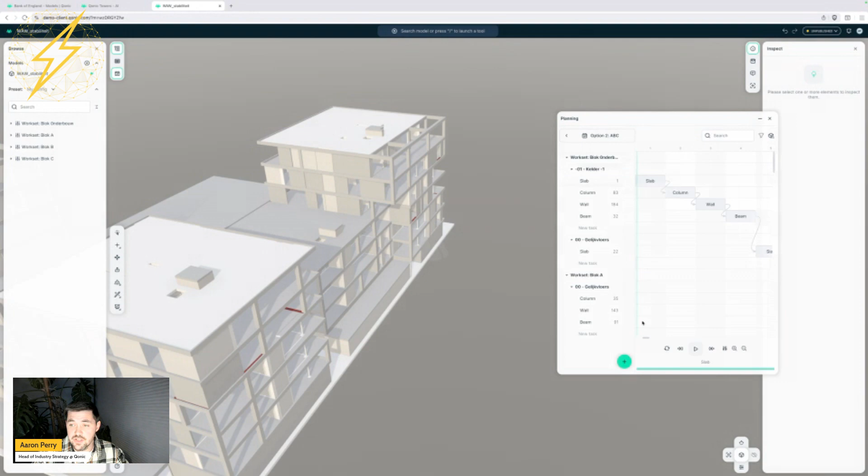Now I have a secondary option, which will build building A, then building B, then building C. Again, this is fully customizable - I can cut the slabs, move columns from one model to another. I've just noticed something strange happened there, but I have the flexibility of repairing this, changing it, and adapting it to make it viable.

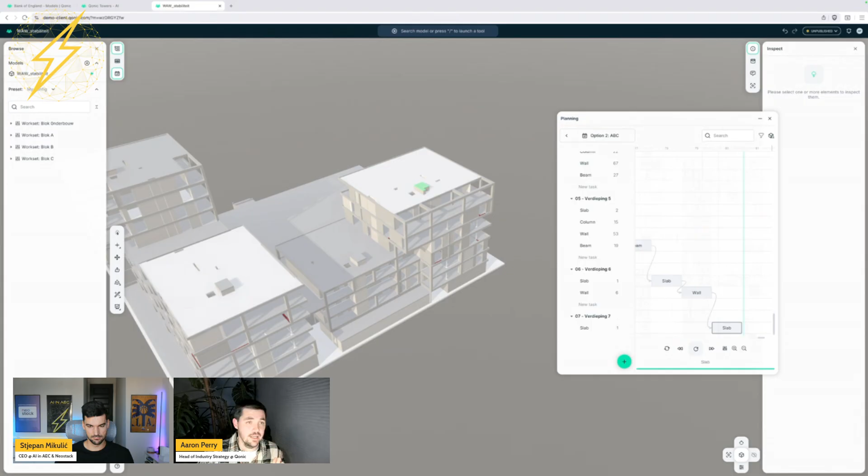This is a really, really specialized task that traditionally takes very complex software to do, but is something that's super easy in Qonic, and really speeds up the contractor's ability to turn things around and answer that.

Maybe just to highlight the direction of Qonic, the way we'll build this out in the future is very much looking at applying AI principles, specifically temporal reasoning - to understand that this cannot be built before this has been built. This idea that you can't put a column floating in space, it's got to sit on another column or on a slab or whatever it may be.

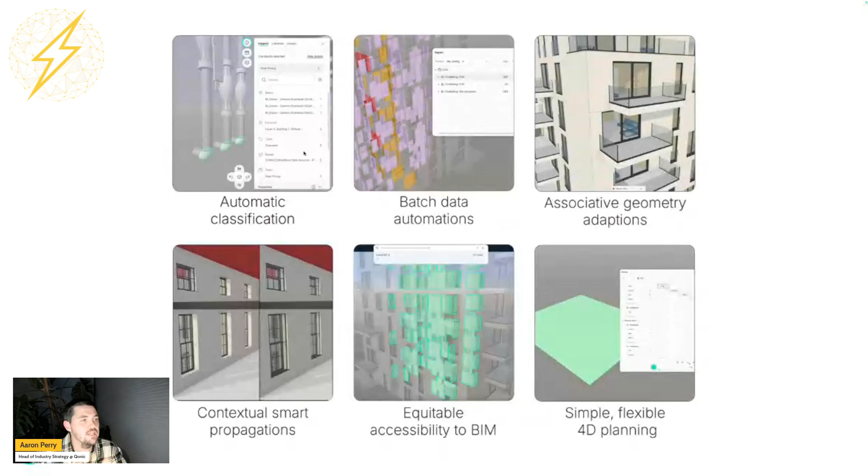So some really fun stuff coming specifically on this, maybe when we talk next year, where we're extending this with warnings and notifications, using AI to alert you to errors and issues and things to consider. This is a really good example of augmenting the user using AI.

So maybe just to summarize - super easy, super fast tools, easy to generate geometry, easy to apply intelligence, and really create a lot of efficiency in the process of delivering digital projects with all the different examples.

For us, we're really focused on removing repetitive tasks, building intelligent solutions and intelligent tools, spotting and applying fixes, so that people can create just better BIM. Basically that's the mission statement, and hopefully some of the things I've been able to get across today.

Man, you've done amazing at showing this, and I think the tool is backing all of that up. This is very impressive.

I think for my first comment, I'd say you covered many tools in one, basically. So you can start your modeling wherever you're starting it, and I think that's also an easier way to onboard clients - it's not like we need a pilot project where you haven't modeled anything. You can just say, we model stuff, we need to fix stuff with data, we need to take quantities, we need to make it 4D and plan it all out. And all of this is possible because you're taking - to my mind it's coming - Sparkel that does quantity takeoffs and categorization, you can take that, something like Speckle too because you can push data across and anchor and so on. So you kind of have all of these tools in one, which is so impressive.

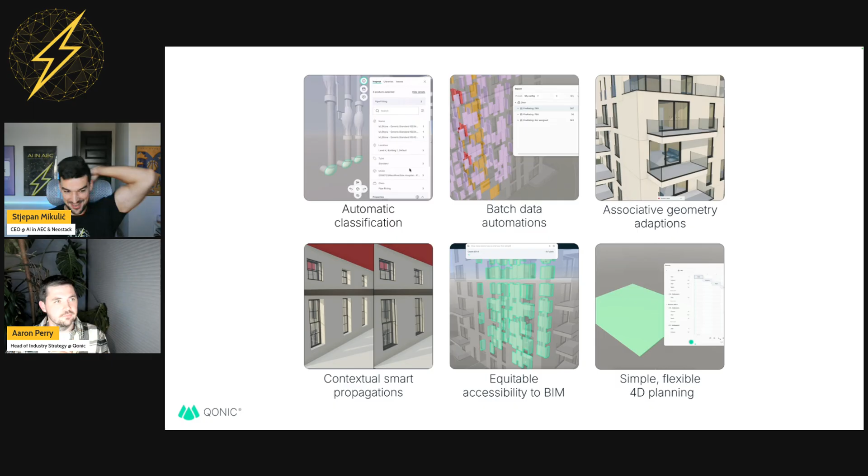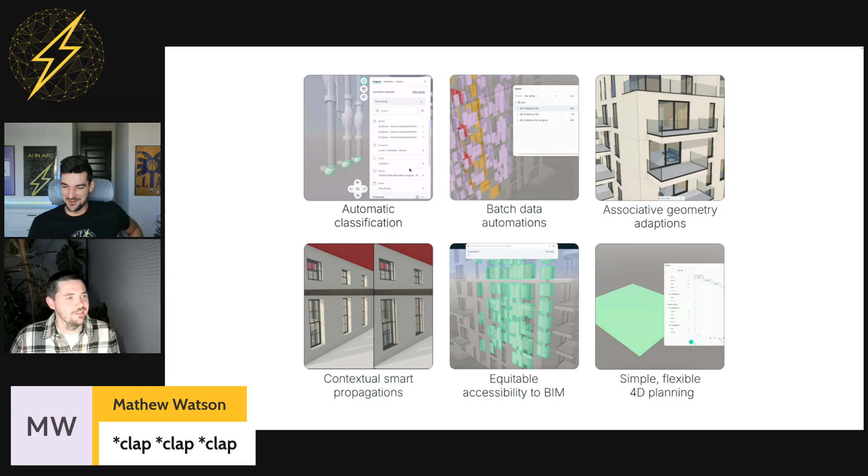Mathew, I see you had a lot of fun in the comment section with questions. We're going to get to them in just a second. Fabian, a fellow Belgian, is also saying wow. Matt here is also saying wow, and Matt is also saying he loves the underlying global logic that connects all the different building components. So that's pretty cool.

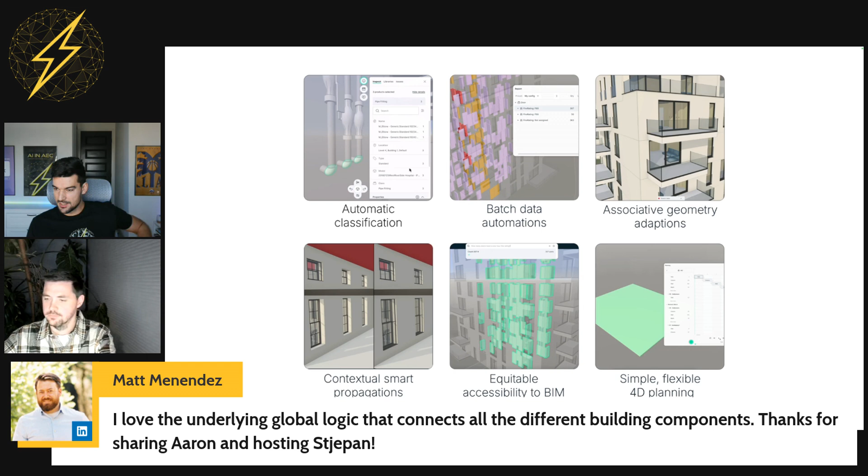Let me get started. This is the question I want to ask first. David, a fellow Californian, is asking: Aaron, part of the challenge in the AEC tech startup space is packaging and pricing. If the price is too high, you won't get adoption. If it's too low, there's friction in your operations and revenue model. The unlimited license you mentioned earlier is a pretty powerful bet. Curious to know how this model ties into your theory on how AEC firms will operate now versus in the future.

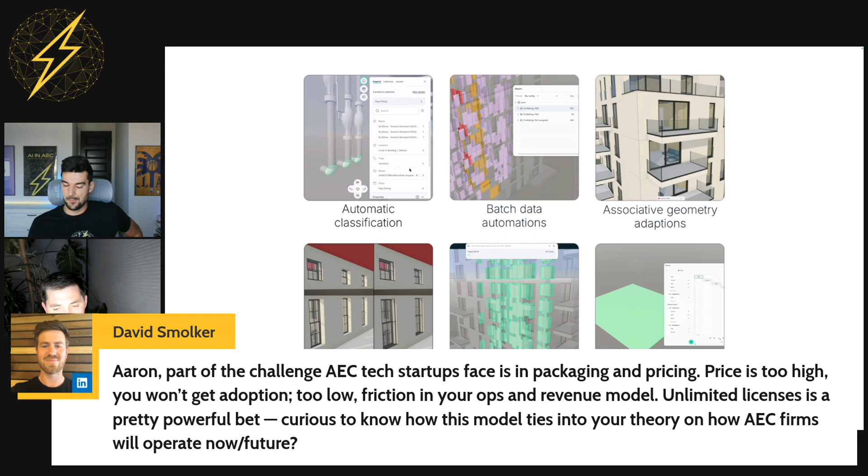Naturally there's the theoretical side we've been talking about, which is that if you stop people from being able to engage because you don't give them licenses, because you're trying to save money as an organization - and I think maybe Adobe kind of started it, but this per-user licensing is kind of what's caused that - we have the ideological belief that you shouldn't be doing that, but you've still got to make money as a business, right?

So it's worth thinking: what is it that actually costs you money? Is it the fact that you're allowing your boss to be able to click a link to be involved? Is that costing Qonic money? Or is it actually just like, oh, we've put another 10 projects into Qonic and the storage space associated with those 10 projects? So the way that we price and the way that we cost Qonic effectively comes from this concept that we're charging for what costs us, rather than stopping people from being able to be involved in the BIM process, which just feels like a very, very strange way to enable our industry to be much more digital.

All the costings are up on Qonic.com for anyone who wants to go have a look. We charge on a project basis. You can actually use Qonic for free right now - the first project you put up is completely free. You can put 5 models up and use many of the features I've just shown you today. Then it's a case of moving into the tiers, where depending on the size of the project or the number of projects you have, that's where the costs change.

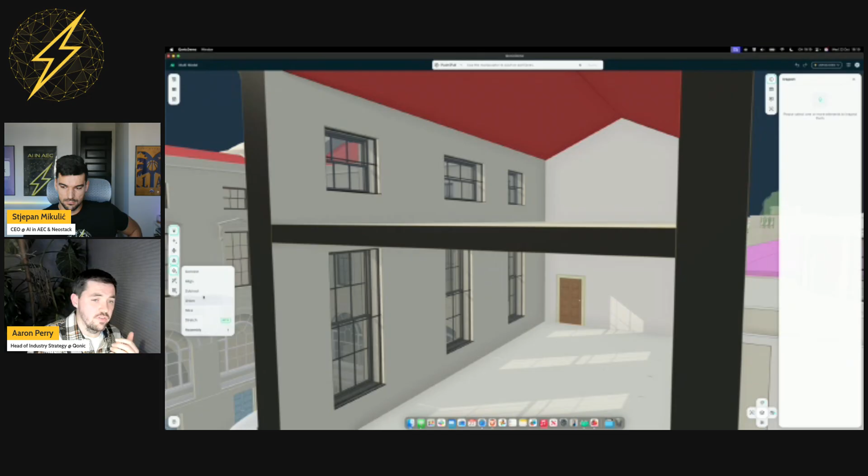We have tools around assemblies, so you can create composites of items. We've got some of that copy detailing stuff you've seen just a moment ago. So we have all the basic geometry modeling tools you'd expect. But obviously, if you want a very detailed door like the one in the background here, that's definitely a component, so you'll see that coming through with our component library functionality - which will be available either just before the end of the year or very early next year. So you have an organizational library of doors and windows and just want to chuck them in. We want to make that as easy for you as possible.

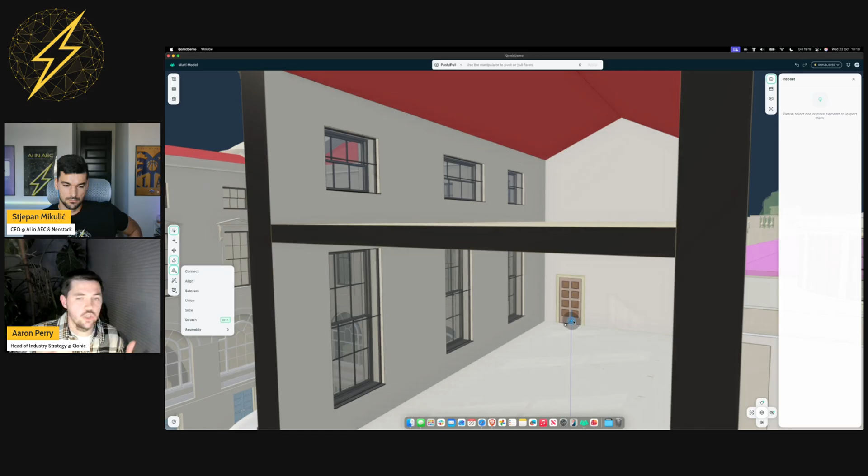All the basic modeling, cuboid modeling kind of functionality you'd expect is already there. It's also nice to see that many of these tools are in beta, which means you're still heavily developing this, which is awesome to see—not like some companies that develop something and then don't touch it for years.

Curved walls, we waited for years and years to come into Revit. So anyway, I'd just highlight that we are moving at a thousand miles an hour in terms of our development.

If anybody watching this is interested in anything I've just shown, or has ideas or comments about how this might develop in the future, definitely get in touch. Let's build this together—we're building it right now. If you have a problem you're trying to solve, let's build the solution to your problem.

I've spent a lot of time going to conferences in the US every year, sitting down with the product team trying to explain the problem, or going to Shanghai with developers and sitting with them for a week showing them the problem, and then nothing happens. That's not the experience you'll have with Qonic. When you get in touch with us, it's about sitting down, going through stuff, and then building it.

I'd like to say we're a lot more accessible. To many of your listeners in Europe, we're very, very accessible. I'm very happy to work with people to build what they need.

What's the best way to reach out to you—through your website, or directly to you by email? This is it, we're not some super corporate American entity. If people want to get in touch via LinkedIn, or send me an email, it's aaron.perry@qonic.com. If people want to go on the website and use the community pages to comment on things, whatever's easiest and most effective for you guys to get in touch with us.

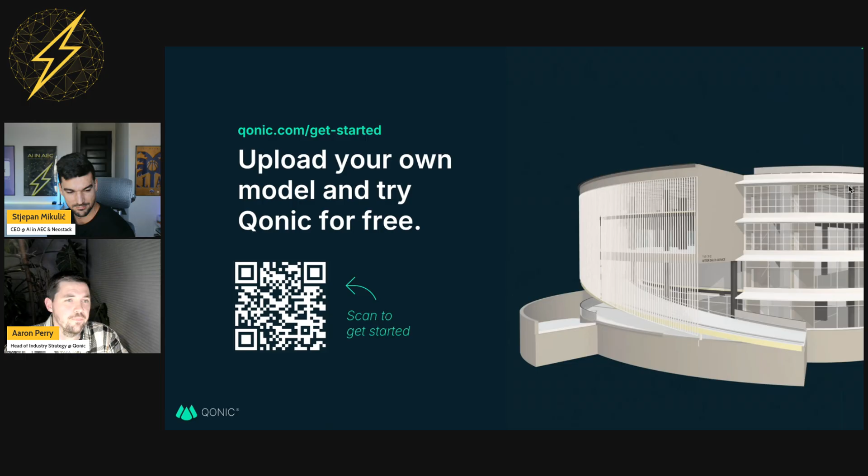Yeah, so there's a lot of things, a really long list of things specifically on the AI side of things that I was really pushing to be able to show today that are just not quite ready. I think if we have a conversation again in 6 or 12 months, it's going to be amazing what we can show you and demonstrate, because this idea that our foundations are set for the use of AI since we're not file type driven - there's some really exciting stuff specifically on the AI and automation side of things.

More broadly in terms of the product roadmap, we are laser focused on modeling. That's the most important thing to our team right now - building more modeling tools, more modeling functionality, really trying to get to where people never need to use any other product if they don't want to. If you want to create a model from scratch in Qonic, you can do that - you have every tool you need to do it from start to finish. That's kind of where our roadmap is heading right now. We are every single week building in new tooling sets for modeling and developing of modeling.

Of course, we still have customers right now that are asking for stuff - some of the 4D planning stuff you see, stuff around the contractor side of things. I'm sure my product manager is out there glaring at me, so I'm going to try not to make eye contact and not say too much. But keep in touch with Qonic, we post quite regularly about some of the things we're doing. You'll see some posts marked as Qonic Labs - these are things we're basically teasing, hoping people comment on them on LinkedIn and give us feedback about where they'd like to see it go.